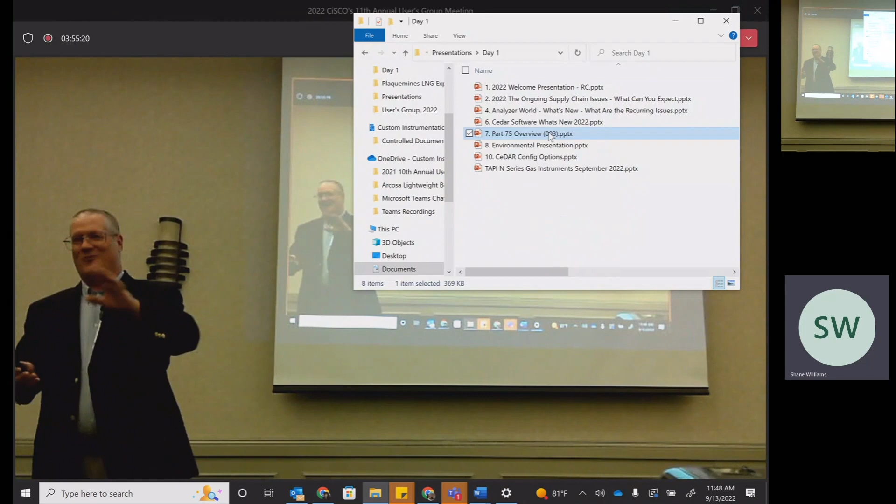But this whole re-engineering, the idea, and I'm not the IT guy. I don't get along with computers. They wouldn't let me on the IT team. But the idea, what I've heard is we're moving from a desktop application that requires a download every quarter to synchronize with your local machine if we've made any changes. The future is a web-based application in the cloud where all those changes are going to be made behind the scenes. So when you go to evaluate a new file and report it, you'll get any new enhanced improvements.

The format is moving from an XML to a JSON, whatever that means. I heard that it's smaller file size. So hopefully that'll help with your upload and download speeds. It'll also allow us to maintain these tables with all these records. You can imagine how many records we get. So smaller file size is going to help us. We're not talking about reporting new elements. That would require a rule change. This whole re-engineering is being done, fingers crossed, without a rule change. So it's just a matter of going from this version to the next new and improved version.

I'd like to say we're on time. Everything's running great. We're ahead of schedule. That's not the case. Stay tuned. Chris Worley, my colleague, is the one who's kind of heading up the re-engineering effort. Supposedly, he's going to have a Teams meeting, teleconference next week, where we're going to announce that we have at least a landing page, a home page for the re-engineering effort with FAQs.

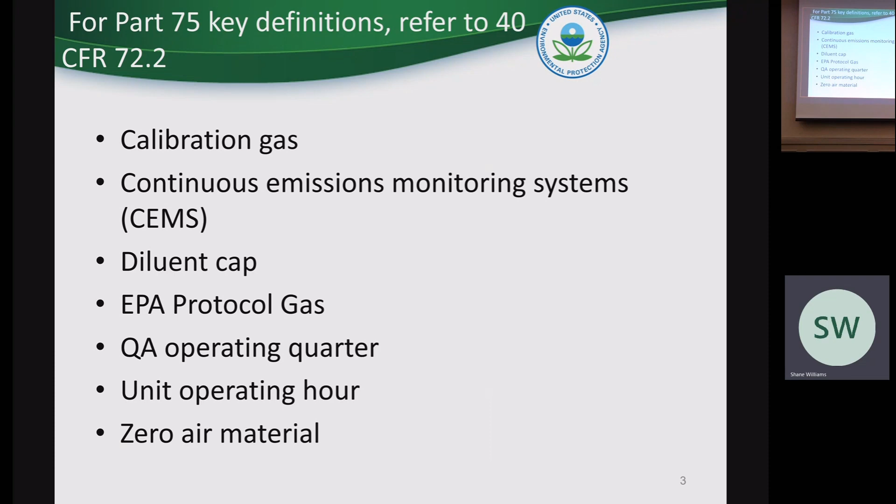It's something to consider if you're running. I was talking to Dave last night. It's something to consider if you're using our data for Part 60 purposes. They have startup, shutdown, malfunction exclusions, but I think they're moving away from that, especially states where they're having you account for everything and they're focusing on startups. And that's a problem with these equations. F factors weren't designed, fuel factors weren't designed for startup situations. But anyway, that's a topic for another day.

What's the purpose of Part 75? Originally, it was established for the monitoring, record keeping, and reporting for acid rain. 75 through 78 defines the purpose of the regulation, the extent of its applicability, compliance dates, prohibition. Applicability is found in 72.6. Generally speaking, if you're a 25 megawatt generator serving the public, selling electricity publicly, you're going to get caught by acid rain. There are some exemptions for IPPs, things like that. And it can be actually units smaller than that, but that's a different subject. I'm not the applicability person.

It was intended for utility-owned boilers and turbines serving electrical generators, rated capacity 25, selling electricity to the grid. Required sources, here's the 3 big ones: SO2 pounds per hour, NOx pound per million BTU, and CO2 tons per hour. If you're an acid rain unit, you're going to be reporting hourly data for those 3. Now, you're also going to have NOx ppm, O2%, SO2 in your case, you're going to be doing probably Appendix D. Heat input, you're going to do Appendix D.

Subpart H came later. That was when folks in the Northeast looked at the acid rain program and said, man, we like the way that's working. Let's do NOx mass the same way. Let's have allowances and let's do trading. Worked real well. It was the OTC program, and then the CAIR program came along, and then the CSAPR program, and then the 3rd version of the CSAPR program got proposed. But most of you guys are not in that. Most of you guys are SO2 mass. CO2 mass was a part of the Clean Air Act. It wasn't compliance, but you had to monitor and report it. It was for planning purposes, I guess. I forget what section of the Clean Air Act said you had to do that.

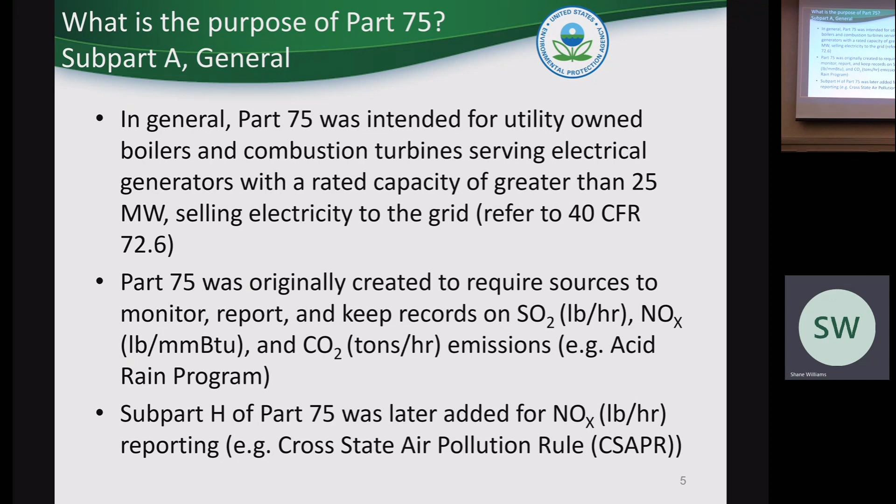Certify a new system completed within 180 calendar days after a new unit commences commercial operation. That's another defined term in 72.2, commence commercial operation. 180 days after the date on which the unit becomes affected. So that's a unit that was exempted and now it became affected. It lost its IPP exemption or something like that, if you're familiar with PURPA and things like that. Certification must be completed on all monitoring systems in 90 unit operating days or 180 days. This is if you are adding a new stack with an add-on control device. Most of you guys aren't going to get covered by that. That was for coal-fired units back in the East that put on SCRs or FGDs, things like that.

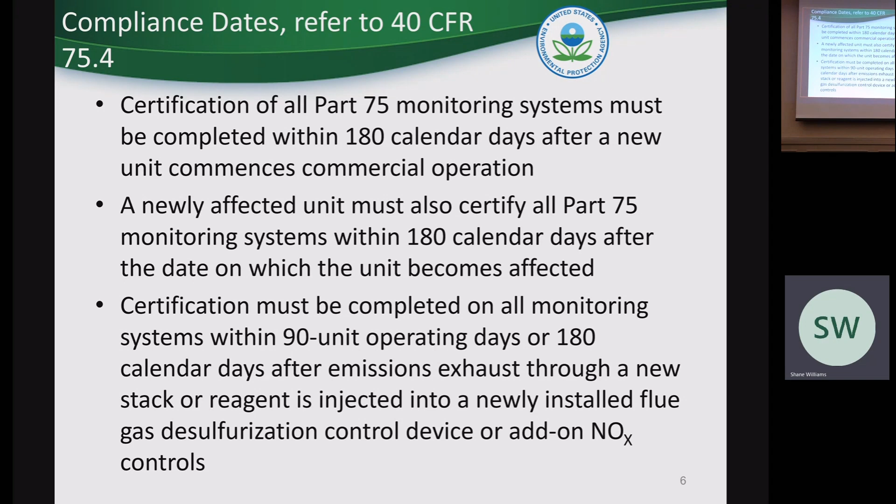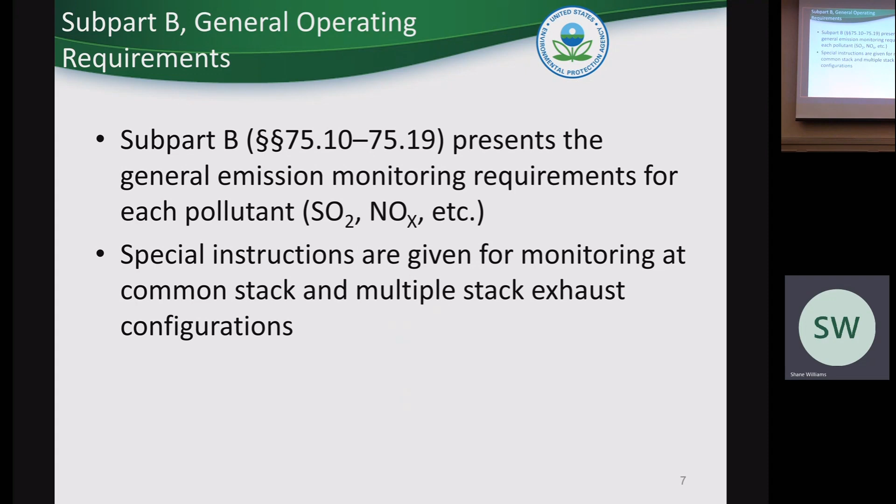Subpart B, 75.10 through 19, general emission requirements. There's special instructions in there for common stacks, multiple stacks. If you guys got bypass stacks, that might fall into your category. Monitoring system required to be in operation, monitoring anytime a unit combusts any fuel. So just keep that in mind. And let's say I use fossil fuel to start up, and after that I burn a biomass fuel all the time. You still got to account for that biomass fuel all the time because you burn some fossil fuel. So again, if you're burning any fuel, it's going out any stack, you got to account for that.

There is an exception if you're using a CEMS for very low sulfur fuel. You guys aren't in that category. But if I was a coal unit that converted to natural gas, I had an SO2 CEMS, I wanted to continue to use the SO2 CEMS, I can do that, but now I got to report a minimum of 2 ppm of SO2 every hour, even if I'm measuring 0.1.

Does anybody measure SO2 with a CEMS? Any of you gas-fired turbines? Anybody? No? Okay, good, I didn't think so, but I was hearing certain things. Maybe it was different units, industrial units, or some refineries.

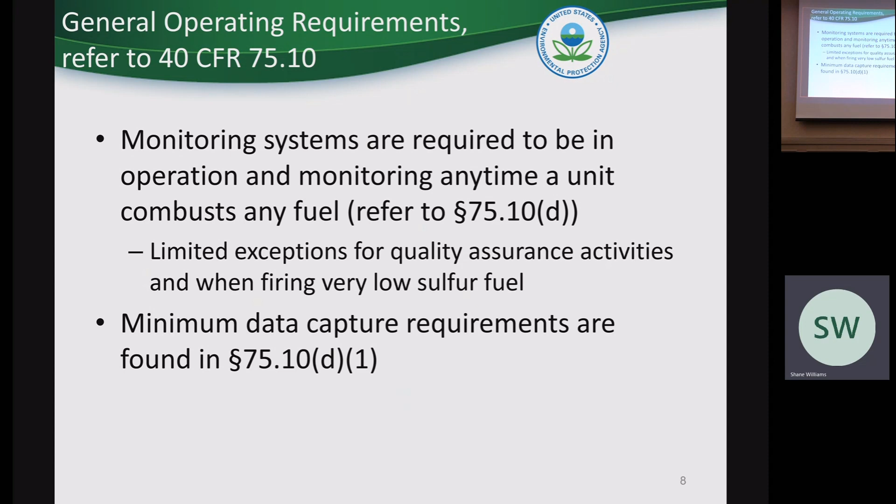Minimum data capture, this is a big one. 75.10 - your CiSCO, your DAS programmer, they understand all that. You use every reading, but at a minimum, you have to have one reading in every quadrant of the hour, unless you're doing a QA activity, and then you've got to have 2 minutes separated by 15 minutes and 2 separate quadrants. That good stuff. And then you can report a valid hour.

75.19 is a big one. It's odd because it's located in 19 and not in an appendix, but it is a monitoring method in and of itself. Gas and oil-fired units only. You have to qualify - you have to emit less than 25 tons of SO2. That's usually not trouble with gas and oil-fired. It's the 100 tons of NOx annually or 50 tons ozone season that trips people up. And it's all or nothing. So if you're doing LME, you're not doing Appendix D, you're not doing CEMS, you're doing LME for everything.

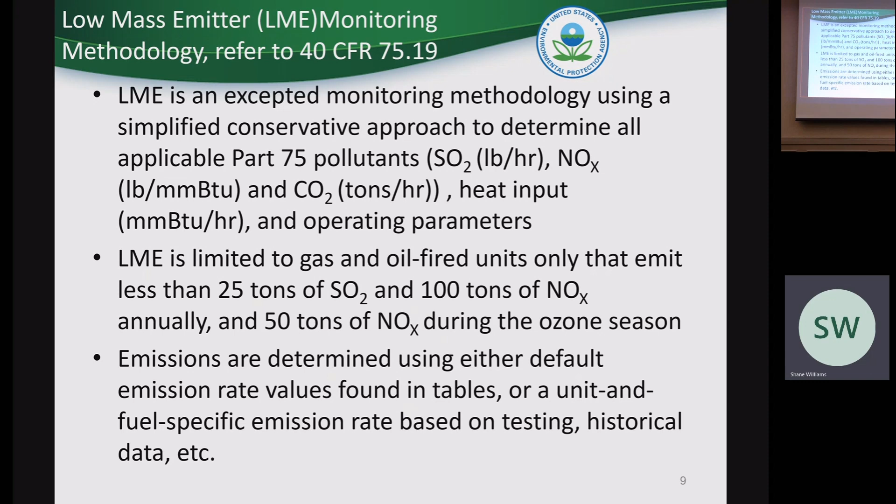And there's defaults in there. They're very high, they're conservative. They're intended to be that way because this is supposedly the least cost alternative, but we want to make sure you're not underreporting. So there are alternatives in there, way too many in my opinion, for determining an alternative to the table value for the NOx default emission rate. You can do testing, all kinds of different iterations of the testing - 4 points, 3 points, 2 points, maybe 1 point. Identical units, I can do subsets. If I have 3 identical units, I can do 1 out of the 3. On and on and on.

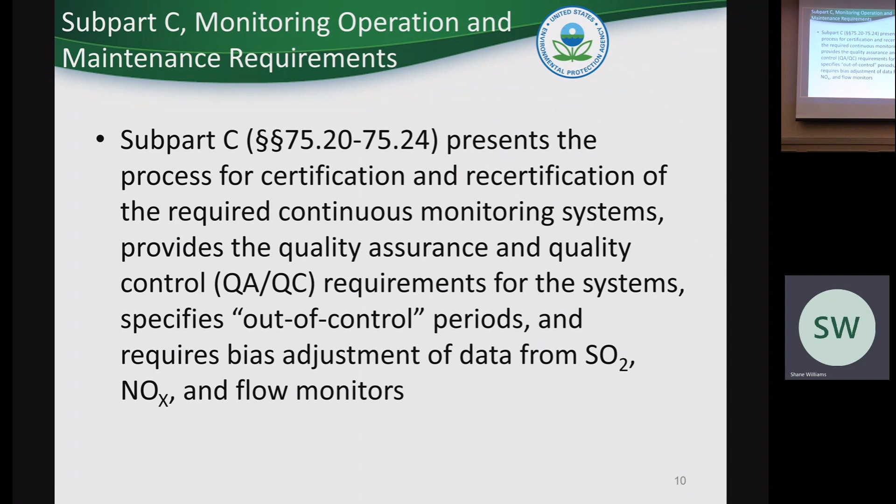Subpart C, process for certification and recertification. The big one's 75.20. It does specify this term, out of control. And again, there is a difference between out of control and invalid data. Bias adjustment factors lays out all the tests I need to do for each monitoring system in order to certify the unit, or recertify - not the unit, the monitoring system.

Took me a long time to figure out what was the difference between initial and recert. So my conclusion is initial is required at locations where a monitoring system was never previously certified. So obviously if I have a new unit, that's an initial. If I build a new stack and I've never sampled at that new stack, that's an initial. There are differences there as far as timelines - how long do I have to get certified? Recertification is shorter than initial. There's also notification requirements, things like that.

The tests that you do to certify and recertify, pretty much the same. Conditional data, that's a provision to help you with data substitution. So I put in a new analyzer today, I can debug it, I run what they call probationary calibration. That starts a window, and I have to complete certain tests in a certain time frame. And if I do those, don't make any adjustments to the monitor, and they all pass, then I can keep all that data. I think this is the one time where if you fail a test, it has retroactive consequences, meaning normally if I fail a test, I go out of control prospectively. But when you're doing conditional data, the condition is that you pass the test. If you do not pass the test, you invalidate back to the beginning. I think that's the one time you do retroactive.

Procedures for both initial and recert. Again, it specifies all the different types of tests.

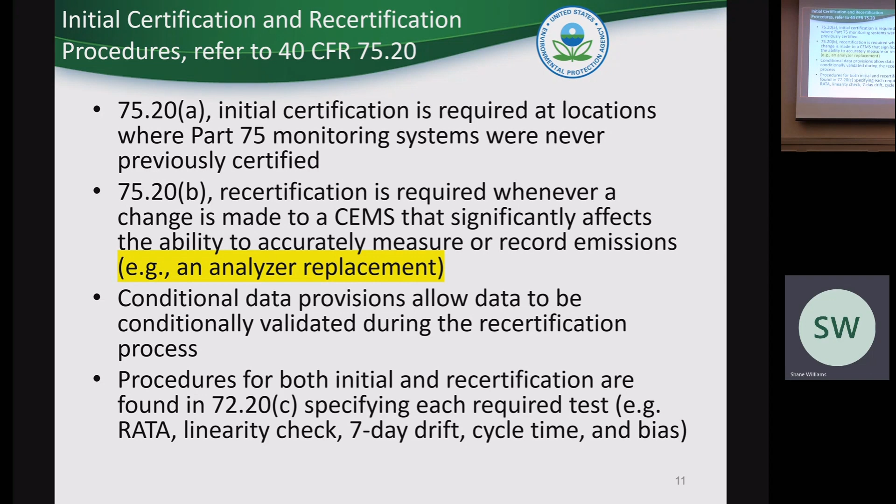Reference method tests, they're in 75.22. They pretty much follow - there are certain exceptions. You can't use a rake probe to do an instrumental reference method. Rake probes would be the multi-hole probes. So even though your equipment can have multi-holes and you can sample that way, the reference method's got to be a single point probe. And I'm talking about Part 75, not talking about Part 60. That's just one example. You can't make a cylinder gas on site using - I forget what the method is, but a conditional test method. You've got to have an EPA protocol gas.

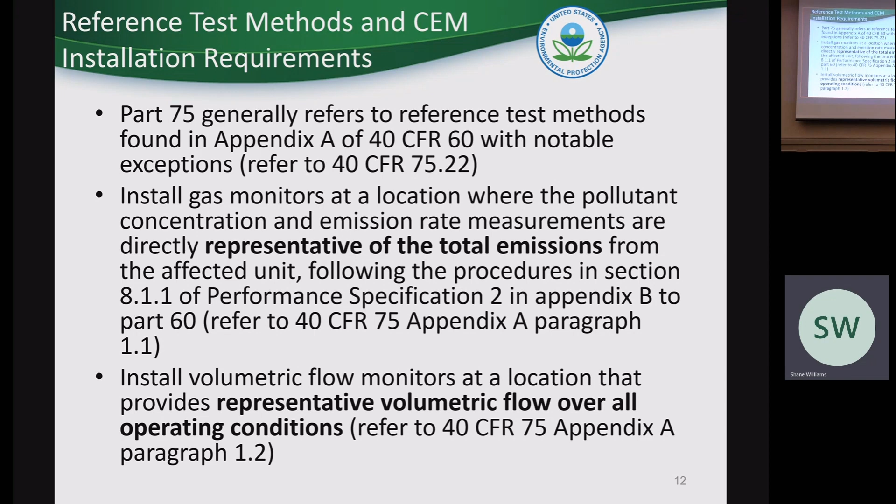So there are certain exceptions in 75.22 that you might want to keep in mind. Somebody a lot smarter than me, I guess, decided that there could be an issue with getting sample volumes and an equivalent volume through each one of those sample points, so that you get a homogeneous sample. I'm not saying it's something we couldn't consider in the future, but it would also be something OAQPS would have to add to their method. See, they own the method, we don't. So just keep that in mind.

We're not equipment specific. You can install anything you want to measure and monitor. Put in 100, as long as it passes the RATA.

One thing I always think about: yeah, it passed that RATA. What's a RATA? It's a snapshot, a stack test. How do I know 6 months from now they're still going to be operating that equipment the same way they did at the time of the RATA? That gets all back to your QA, QC, your operating procedures. That's the stuff we don't look at through ECMPS. And if somebody were to come across that type of situation during an audit, they would ask, how do you know your sampling equipment is operating the same way it did during your RATA? Because that is a requirement.

If I'm adding some kind of an adjustment factor, which believe it or not you can do, you got to apply that adjustment factor consistently all the time, all the way up till the next RATA. And then if it passes, that's fine. We're down in the weeds, but anyway, just keep that in mind. If you want to install equipment with multi-point probes, 4 probes, 2 probes, have at it.

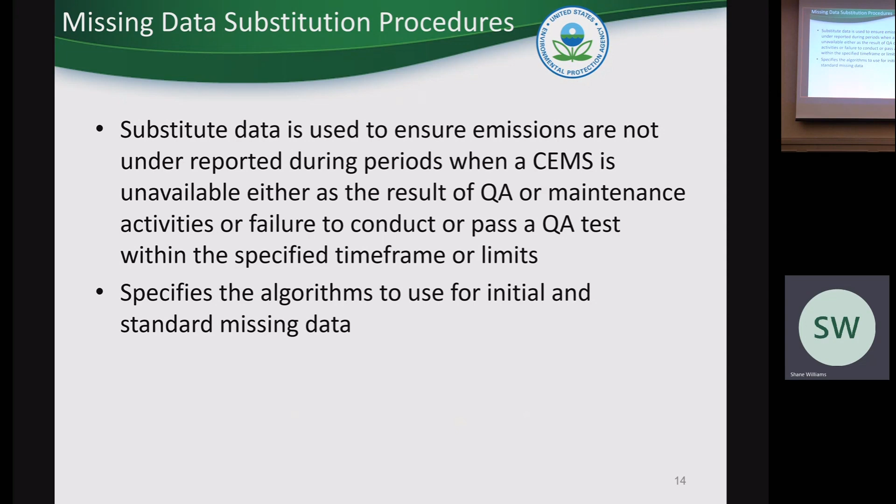They use historical data for missing data. Again, this whole thing about PMA, you're probably familiar with that. Even in Part 60, it says you got to maintain your monitor at 80% availability or 90% or whatever. Same kind of concept, except this then dictates what value you use for substituting that out. Whereas in Part 60, if I fall below 80%, I get an NOV or something like that.

Pound per million BTU and stack flow data are grouped by load bins. The idea is there's a correlation between load and NOx emission rate, so it allows you to group by load bin. If you're in load bin 7 and you have an hour of missing data, you look at load bin 7 historical data and pick a value from that load bin. You wouldn't go to load bin 10 or load bin 1.

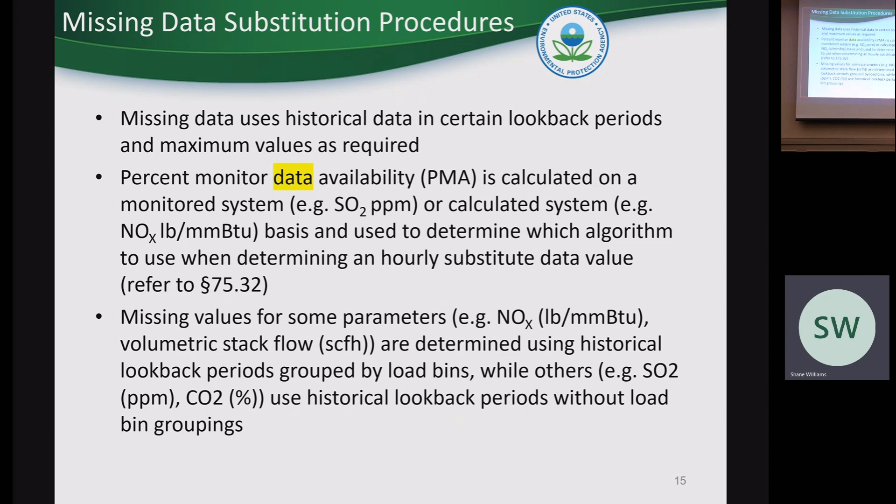But your DAS is programmed for that already, so you don't have to worry about that.

Subpart E is alternatives to monitors. There's not many out there. PEMS - it doesn't have to be a PEMS, but it could be something else. It requires a petition, requires a comparison, 720 hours at a minimum between a certified CEMS and a reference method against your parametric system.

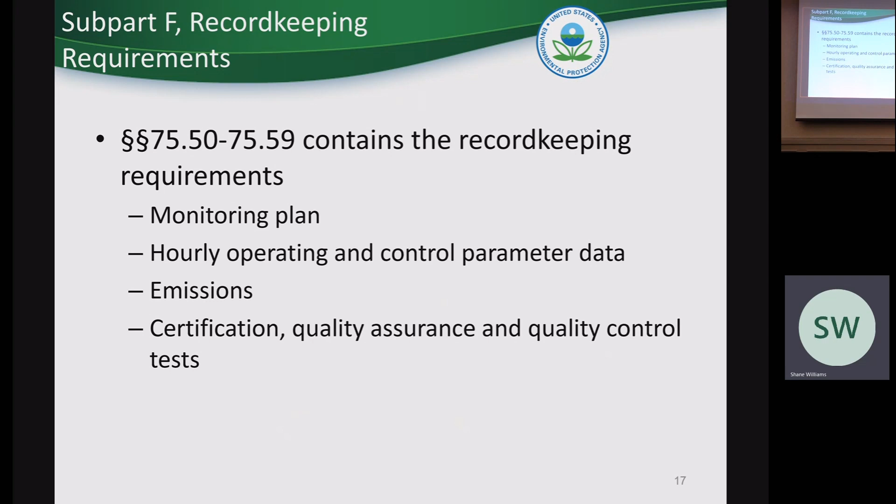7557 has method of determination codes. So if you're looking at rows of data, there's this thing called a method of determination code. If you see an 01, that means it comes from a certified QA CEMS. If you see something like a 12 or an 11, that might be missing data or a diluent cap or something like that. But it allows me to know what am I looking at - quality assured data, missing data, a range exceedance, et cetera. It's a good thing to have.

Subpart G, the reporting, again pretty much goes back to the record keeping items. It says, okay, this gets reported electronically and this gets maintained hard copy. There's a lot that gets maintained hard copy, like RATA test reports, parametric data, all that good stuff. Submissions have to be made by the DR, the designated representative.

You fill out a form, you send it to our group. You can be an agent, you can be an alternate to a DR. Those have to make submissions. Technically, even notifications have to be sent by those folks.

Unfortunately, if you're not a DR, you're notifying somebody, dotting your I's crossing your T's about an initial cert RATA, it has to come from these folks with a statement: I certify, to the best of my knowledge, etc. There's a statement that comes with that, and it's all out of 7221 or something like that. But your DR knows all about that.

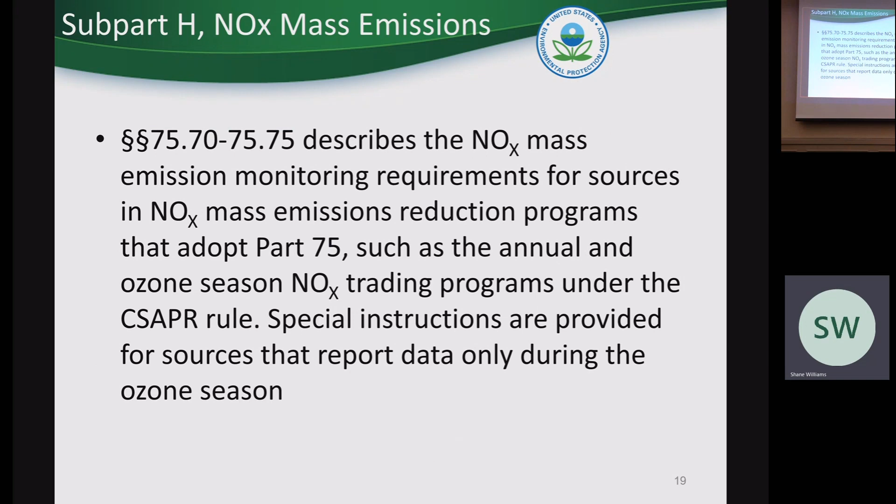Subpart H, that's the whole NOx mass thing. I'm not going to even bother with that. You guys, except for one, we can go over that, but you're probably very familiar.

Appendix A sets up the CEMS installation and certification test procedures. It sets up how you determine span and range, MPC - max potential concentration - and do a span and range evaluation. When do you need a dual range? Things like that, that's all in A.

It also gets into the RATA test procedures. If your stack tester's telling you 'I'm following 7E, and they're only following 7E,' you might have problems because determining the sample points for a reference method 7E is done here, not in 7E. So if you're doing a single point reference method sample, for example, it better have been preceded by a 12-point strat test, and it better meet the criteria in Appendix A - well, for you guys it won't be hard because it's 3 ppm or 3%. But anyway, they still need to do that 12-point strat test each and every time.

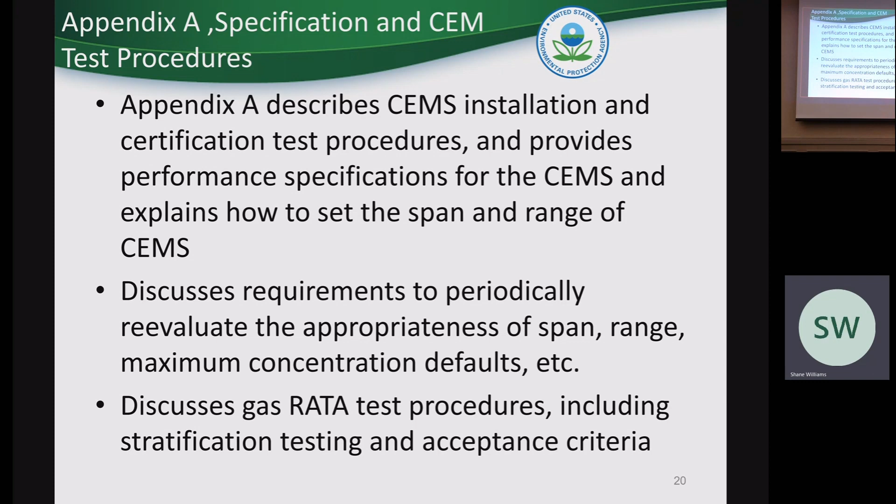The idea is, like you've heard before, ductwork starts to leak, things change, patterns change, stratification, stacks get shorter - things happen. But there's confusion sometimes between the reference methods and Part 75 as far as sampling procedures.

Appendix B, that's the ongoing QA requirements. That's where you get into things like grace periods. I think grace periods are a great thing. It makes no sense to me to say, okay, you got to do a test every calendar quarter - what if I didn't operate that calendar quarter? Does that make me turn the unit on just for that purpose? Part 75 says no. When you start it up, we'll give you 168 hours to do that linearity, or 720 hours to do that RATA test, things like that.

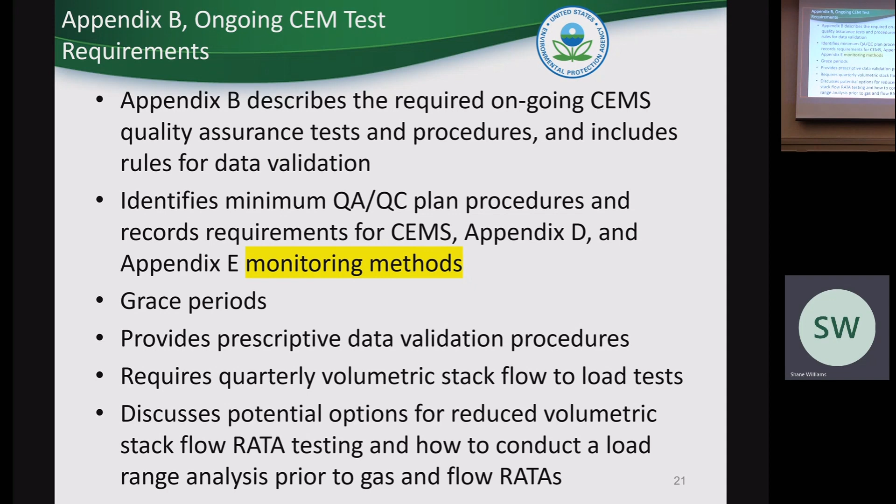It also has real specific data validation language. It says, if I fail a test, you start invalidating on this hour, you continue to invalidate until that hour. I love Part 75 for that. Part 60 is great too, not to knock my brethren, but 75 is - and it has to be that way for 75 because it's an electronic program. It's all reported hourly data, and it's all trying to verify that hourly emissions data against all that QA tests. It needs that specificity.

C, don't even know why we have it. I can't imagine an alternative to missing data from 75.30 through 75.34. It does talk about load bins, which are important.

D, a lot of you guys are doing D. That's for SO2 mass, and that's for heat input. So you're doing sulfur sampling, GCV sampling, or you're following contracts. You're using fuel flow meters. You're calculating heat input. You're taking that heat input, using equation G4 to calculate your CO2 mass. It's not used for the NOx pound per million BTU calculation. It's used for SO2 mass calculations. And again, it's also used for CO2 mass calculations.

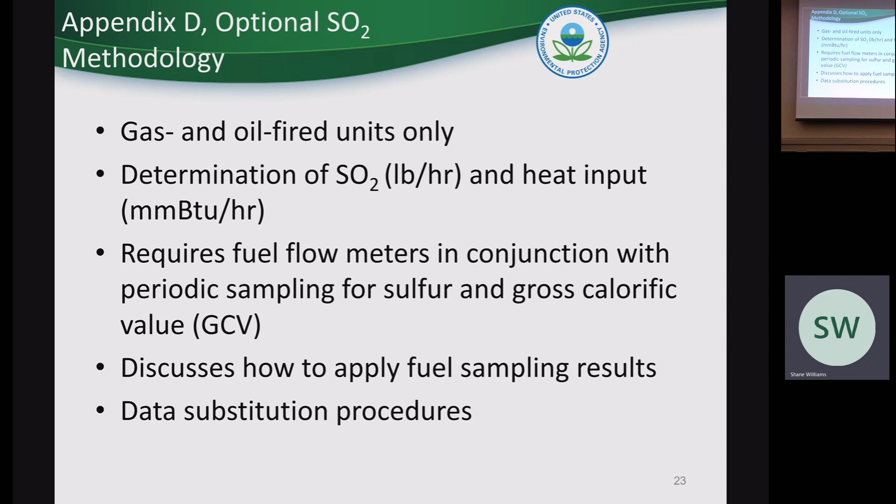There are its own data substitution requirements, no grace period. So your fuel flow meter doesn't get a grace period. It is on a calendar quarter basis. Actually, sometimes it's a fuel flow meter QA operating quarter basis. Talk about that too. But there's no grace periods.

E is for NOx pound per million BTU. It's a stack test four load points. You have to do Appendix D with it because on the x-axis is your heat input. And then your y-axis are these NOx pound per million BTU curves. You pick a point on the x-axis, you go up, and that's the pound per million BTU value you're going to report for that hour.

How many? Not many, I don't think. It's a good question. I'm always looking at that. And I have a spreadsheet back in the office for that purpose, and I don't know off the top of my head. LME is 500 or 600 units. I would think Appendix E, nowadays, it's oil and gas only, you have to be a peaking unit also. And one thing I'll say, if you use LME, which doesn't make sense to me, you don't have to be a peaking unit. Peaking unit is a capacity factor: 10% on average for 3 years, no more than 20% any given year. I would say Appendix E units are probably less than 100.

Well, you shouldn't have told me that because now it's like, well, why in the world aren't you using those NOx CEMS? No, I mean, why are you using LME? Well, that makes me happy. That's where I want to get at LME and change it so that you can't do that. So I want to put it, again, turn the recording off. Yeah, turn the recorders off.

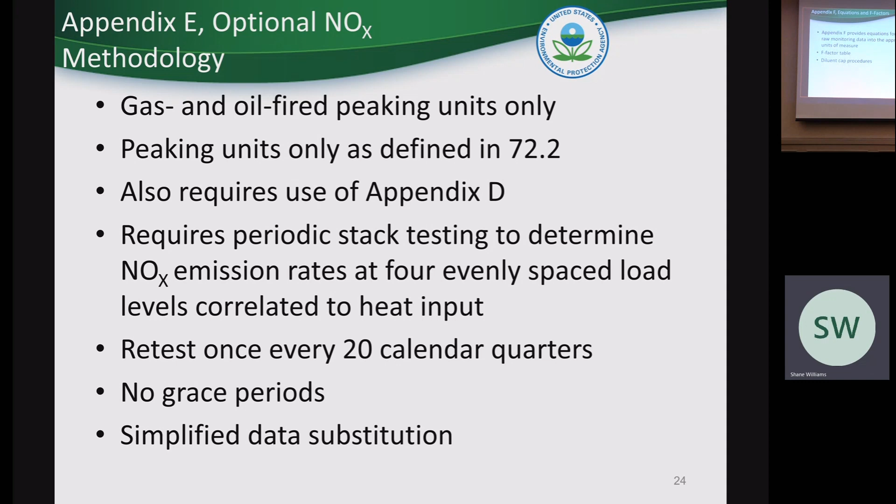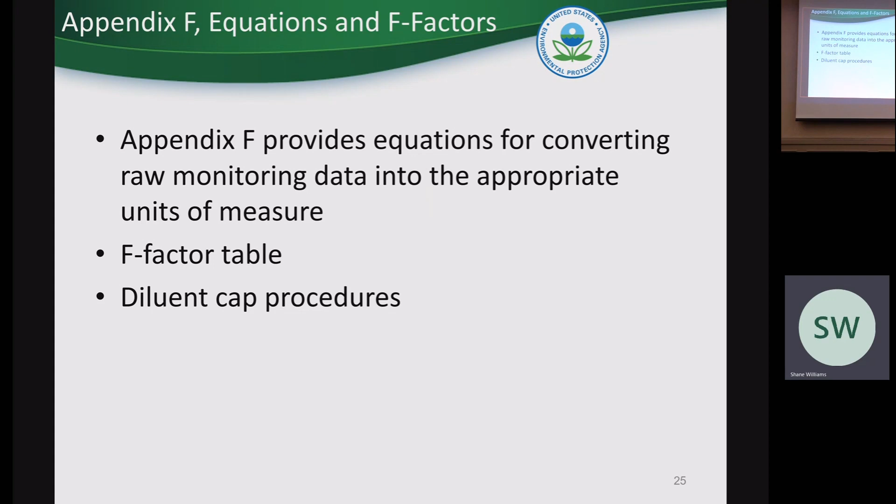Appendix F, that's where all your equations are found, NOx pound per million BTU, diluent caps, F factor tables. They're there. Diluent cap procedures, it's a great thing. Well, I think it's a great thing. Somebody else might disagree. Appendix G, that's your CO2 mass calculations. Most of you guys are using G4. If you're in RGGI, which is a regional greenhouse gas initiative in the Northeast, you can't use G1.

G1's an estimation methodology. I think we're down to 20 or 25 units that use G1 instead of G4. None of the coal units use G1. G1, again, I don't know why it's there, but the coal units are using F11. They already monitor CO2. They have stack flow monitors, so they just use those to calculate and report CO2 mass. Everybody does it. Coal units.

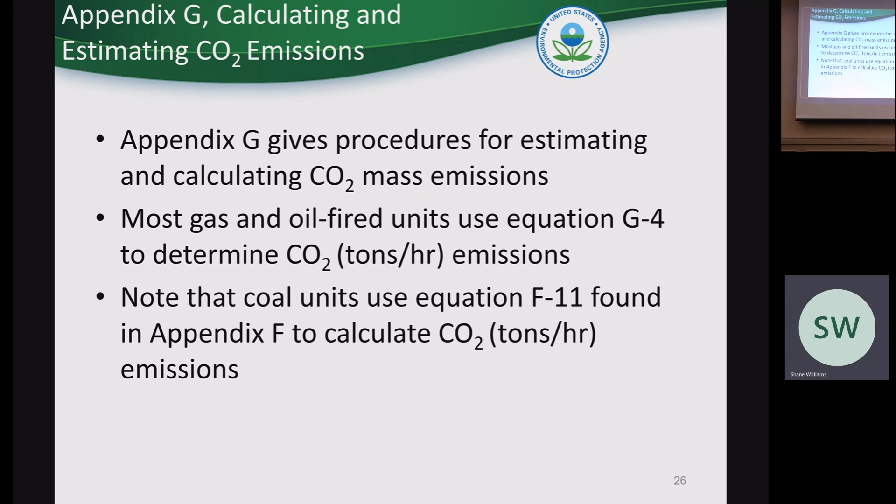Be here the rest of the day. I'm going to try to cut out early because they said getting a cab here is kind of like getting Pony Express, but I'm going to try anyway. I intended to stay a little longer tomorrow. Love to talk to you guys. I can stick around all day. There's Reggie. Fine. Good to see you.

Well, I'll tell you my answer. ASME 9M. You don't need a petition for that. Do the weight gravimetric method. Forget about going through the petition process. 9M. No, ma'am. We found that out after we issued all these petitions. You know, Bob Valero started this for me 6 years ago. And then somebody said, well, we can use ASME 9M, can we? I thought, well, sure. We didn't think you could.

See, I'm real dumb when it comes to fuel flow meters. I wish I could tell you I've read every AGA, ASME method and I can recite them verbatim. And they all are, you know, do the quality assurance against a flowing fluid and meet 2% of the upper range value and all that.

I don't. So there's a lot I could learn from you guys on the fuel flow meters. What I try to do on an ad hoc basis is do a kind of back of the envelope heat rate calculation just to compare quarter over quarter heat rates for Appendix D units to see if there's a shift in the heat rates, and if so, why? If there's a 10, 20, 30% heat rate change at the same load bin, so let's look at load bin 8, heat rate changed by 20 or 30%.